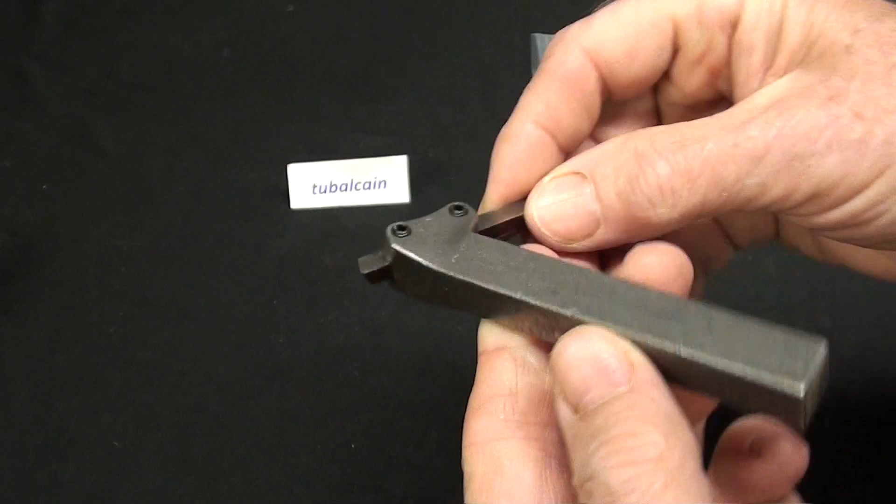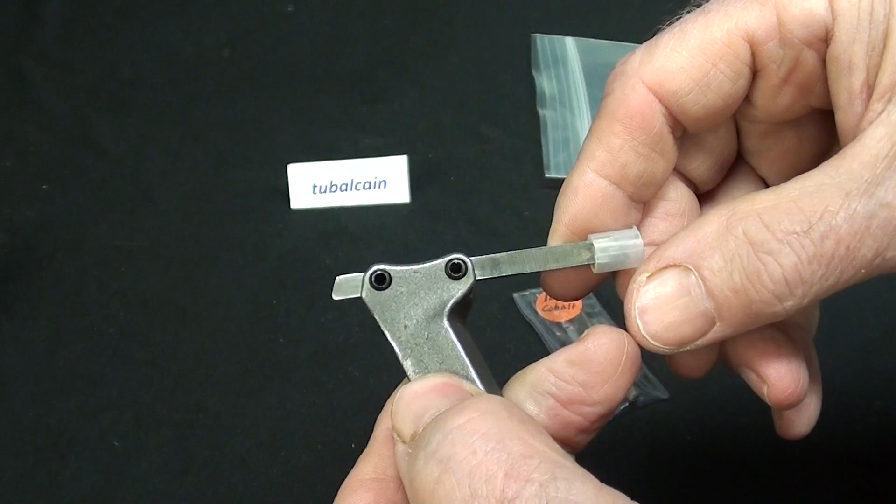First of all, I received an email and then a nice present from David Wimberley, and what he had given me was the Wimberley tool holder, and these are the instructions for that, and this is what it looks like. It is to be held in a Aloris type of tool post. Very interesting, and there are videos on that, and you'll see me using this in a future video. It uses a common high-speed steel tool bit. I think you're going to find that interesting, and so am I, in that I have never used one of these. Thank you very much, David.

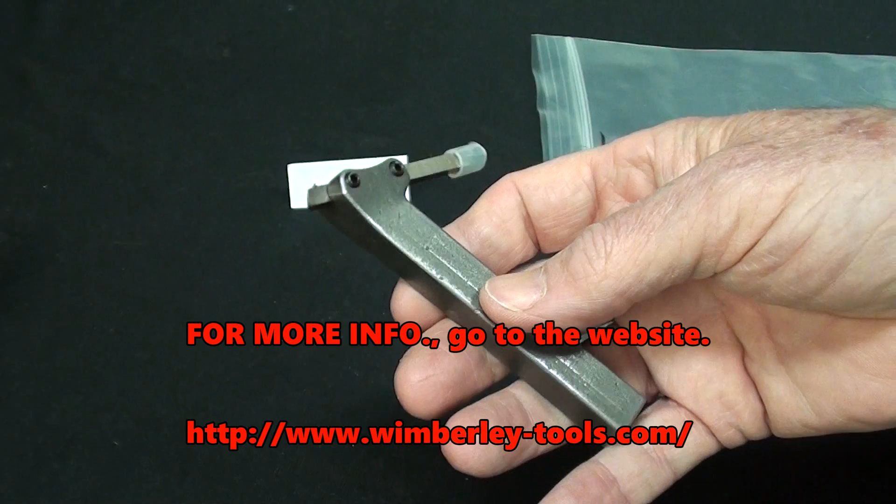Just yesterday, out of the clear blue sky, I received a mailing from Donald Warner from Illinois, and thank you very much for this, Don. In it are several catalogs, machine-type catalogs, but I particularly like this one on Atlas shop equipment, and it's from 1940. Now, I already have the one from 1950, and I have enjoyed looking through it and perusing through it, but this one is of particular interest.

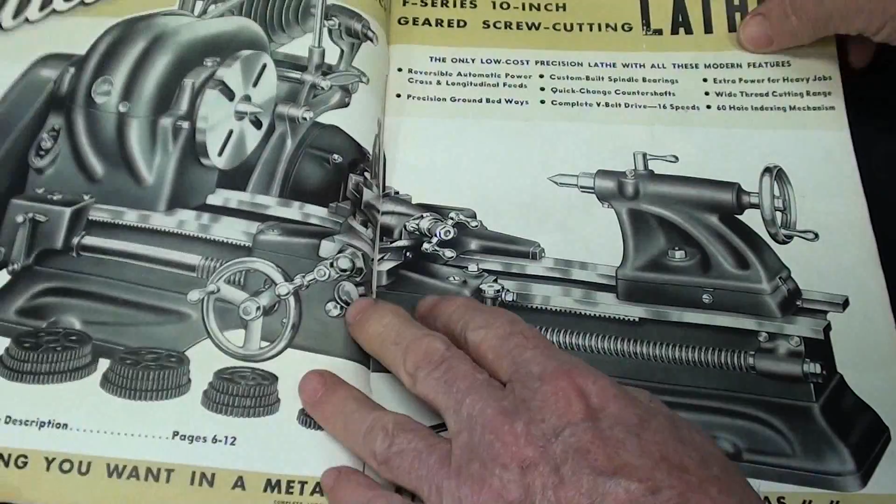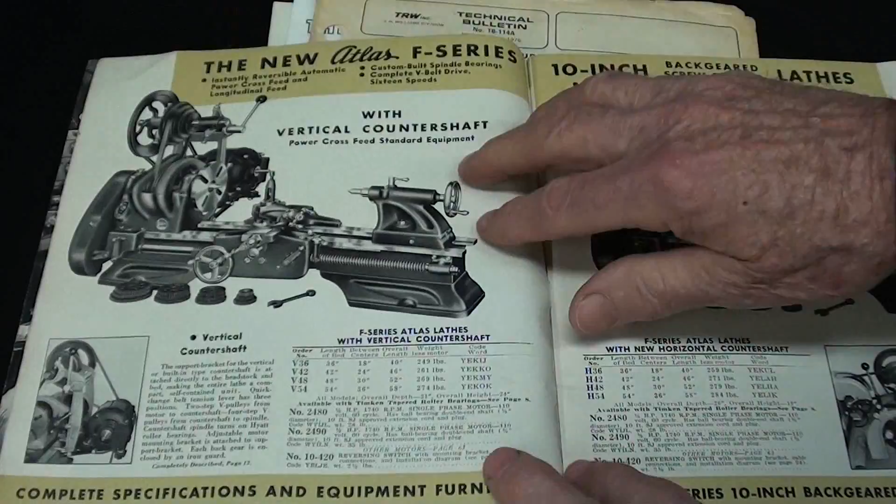It goes into great detail on the construction of all their lathes, the development of them, the features. Apparently the F-series here, 10-inch, was brand new in 1940, or those were the improvements that they made, and I noticed it's available both with plain bearings and tapered roller bearings, as shown here.

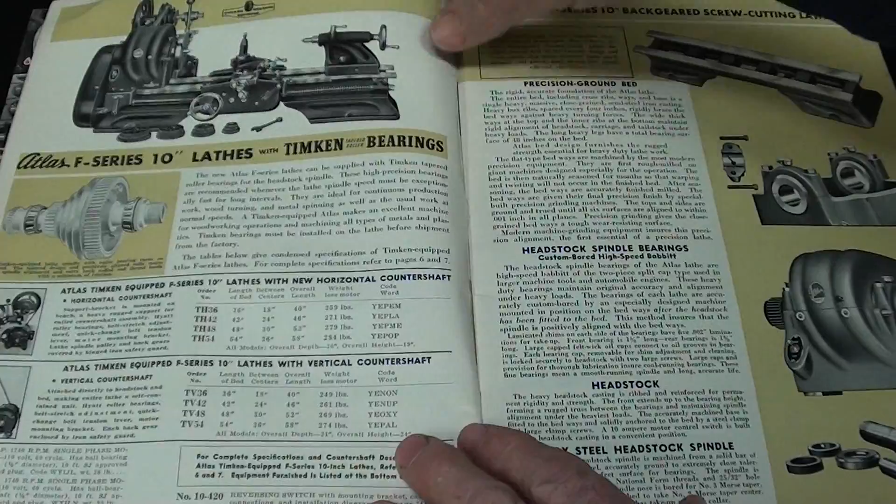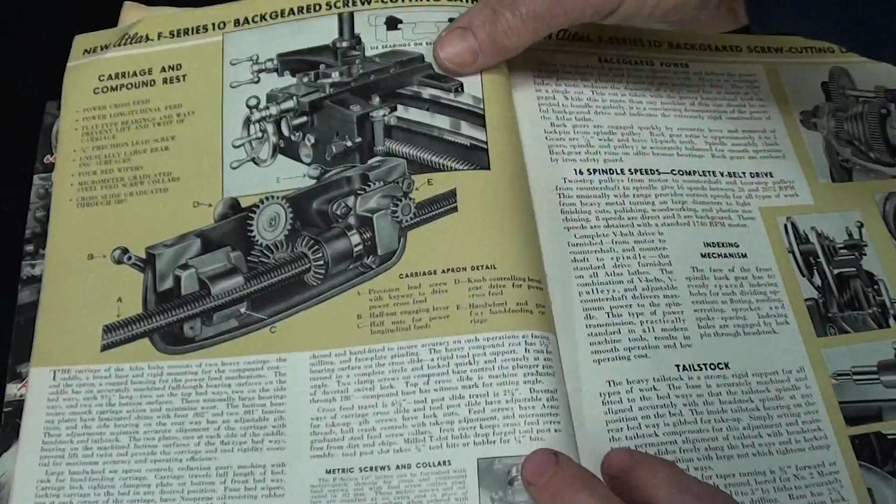Very detailed information on the construction. Look at those pictures of the apron, inside of the apron. You know, I didn't know that this was available, if I have that picture.

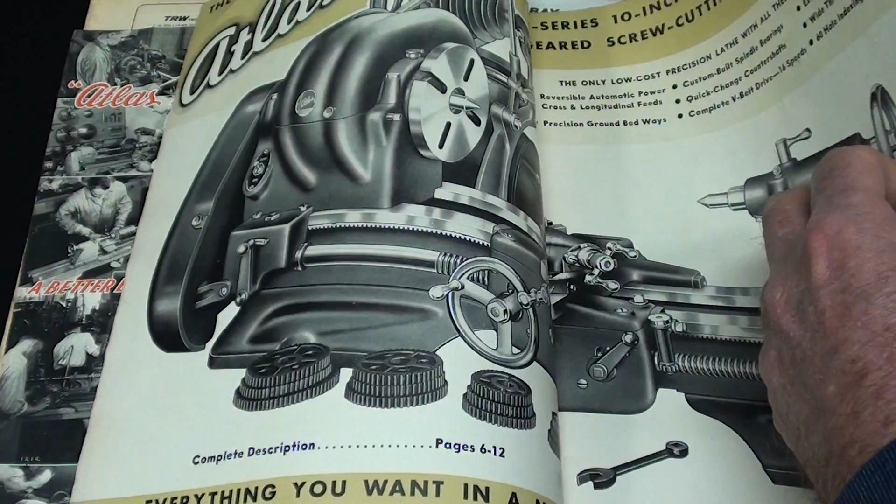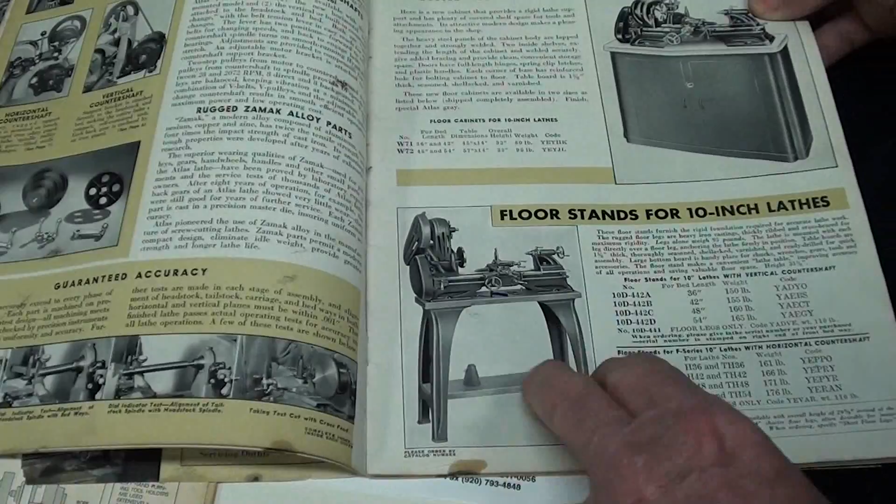Maybe I'll run across it, but on a cabinet. Well, there it is - the 10-inch on a cabinet that they provided. I've never actually seen one in real life, but there's the usual base that you see it, or it could be table mounted.

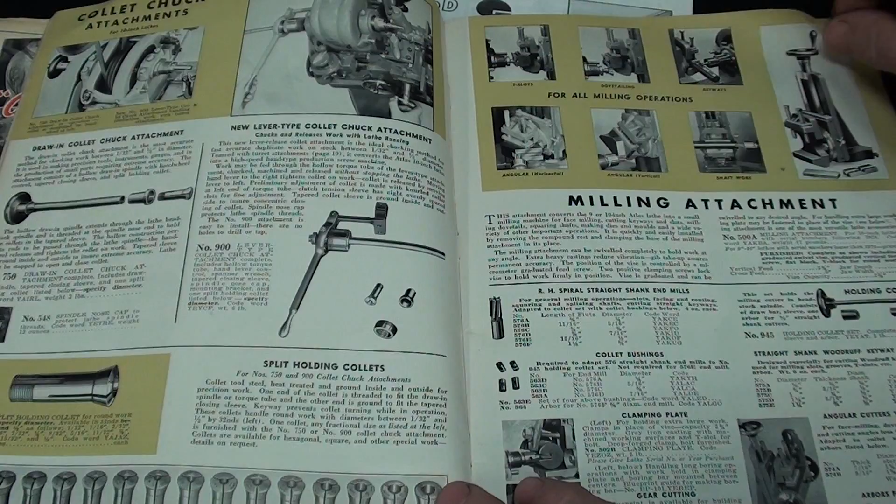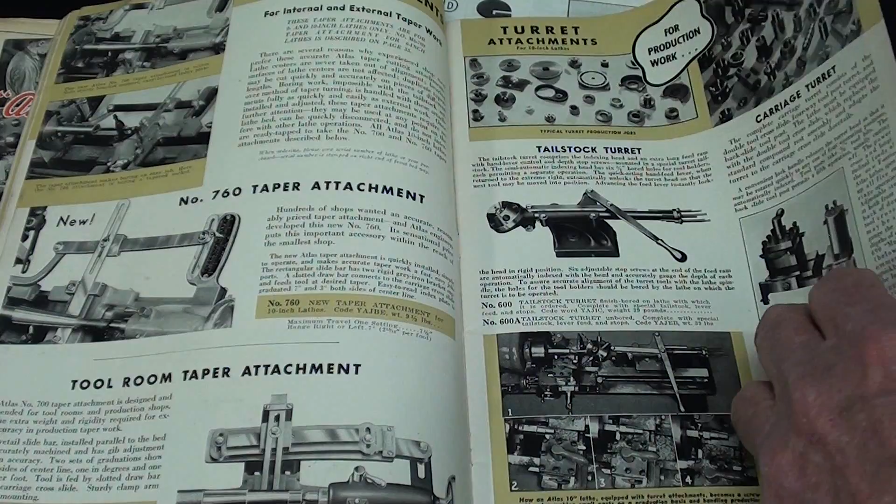And then all of the attachments, chucks, collets, and several things that aren't available anymore. They either didn't sell, or there was some reason why they took them off the market. Conversions to a turret lathe. And this was before the Second World War, and I was a negative 3 years old when this came out.

So I have already spent a couple hours looking through this. I really liked it.

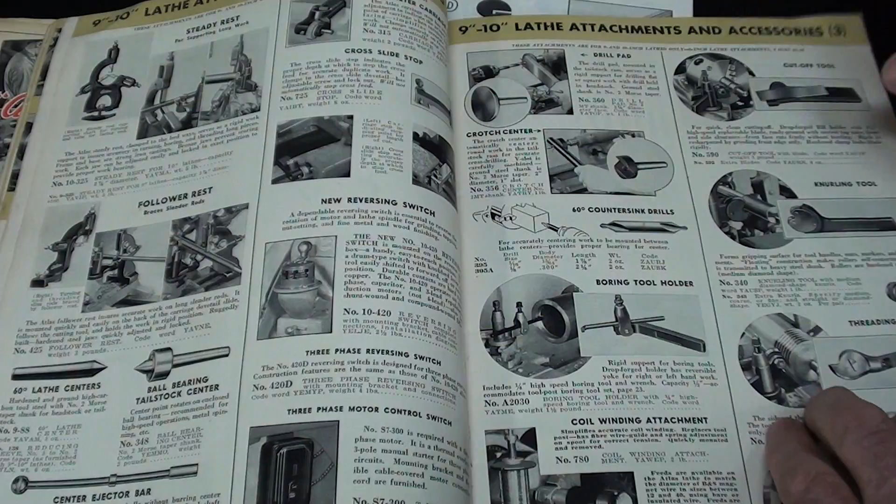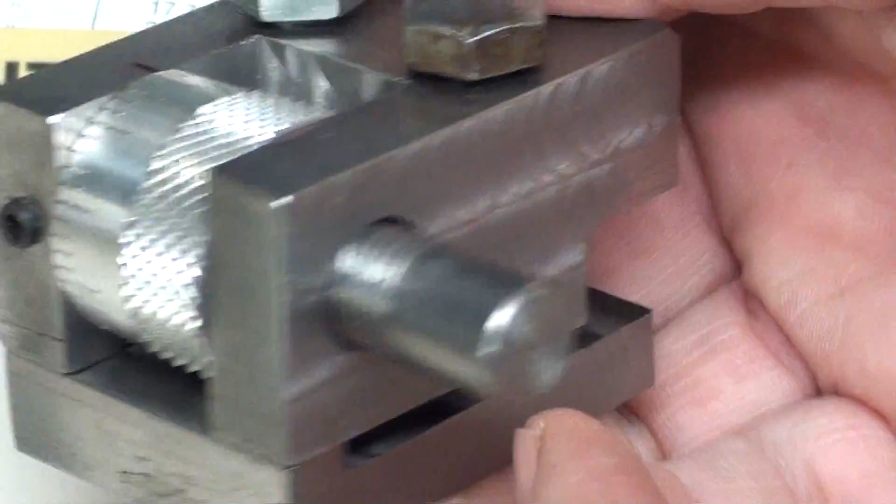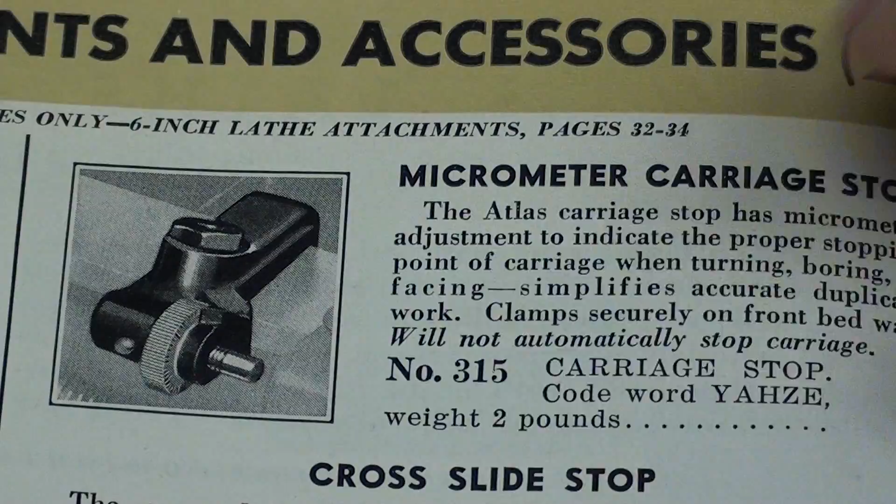This is the standard Atlas carriage stop, and you've seen me use that often, and in a recent video I showed you how to make one of these. But there was something that caught my eye in this catalog, and that is their micrometer carriage stop that they had in 1940, and look at the way it clips onto the bed.

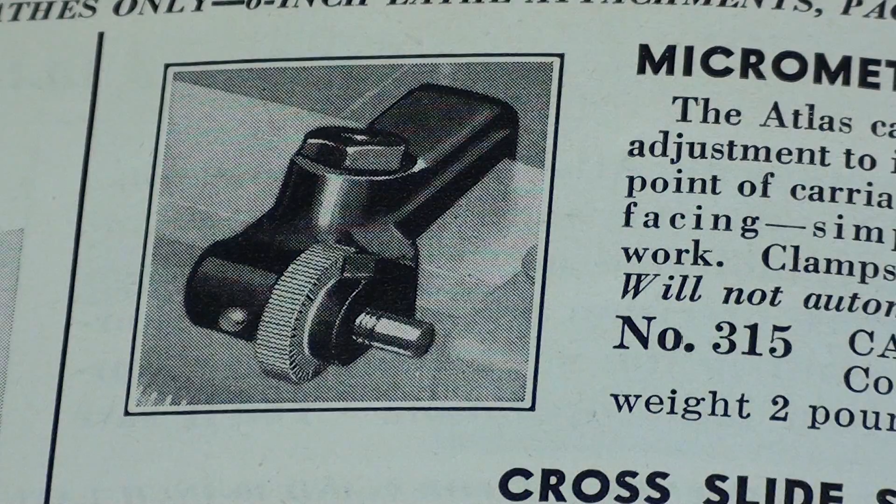Now, this must have been a failure. I've never actually seen one of these, and the reason it would have been a failure is that it would have prevented the carriage from advancing far enough toward the headstock, I believe. It would block the movement of it. But pretty neat little deal, isn't it? And that is one that couldn't cock. That's why I'm showing you that. It wouldn't be able to cock.

And in a follow-up of this, some of the comments were such that it ought to clamp across that. Well, they tried that and it didn't work. So that's why I'm pointing that out.

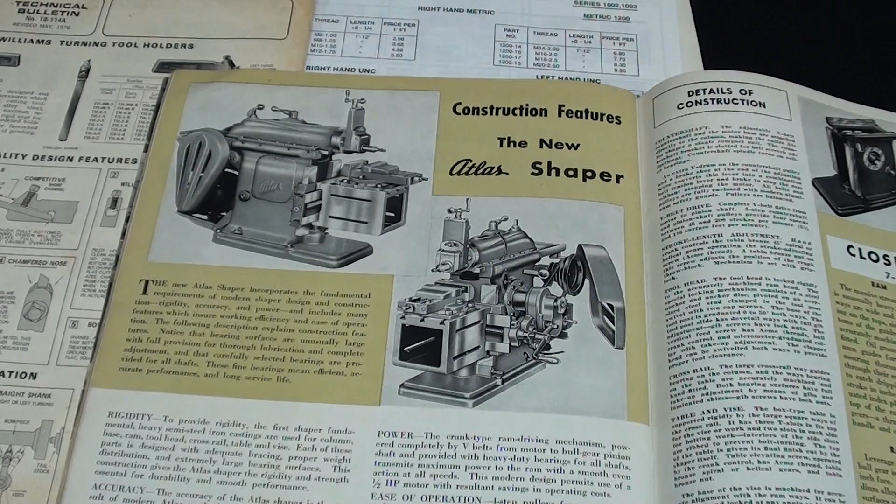Apparently their shaper was new, or darn near new, because it says new here in 1940. And in this catalog they did not have their little milling machine, so that must not have been introduced yet. But there are several pages here telling you all about its features, and then a grand picture there of it.

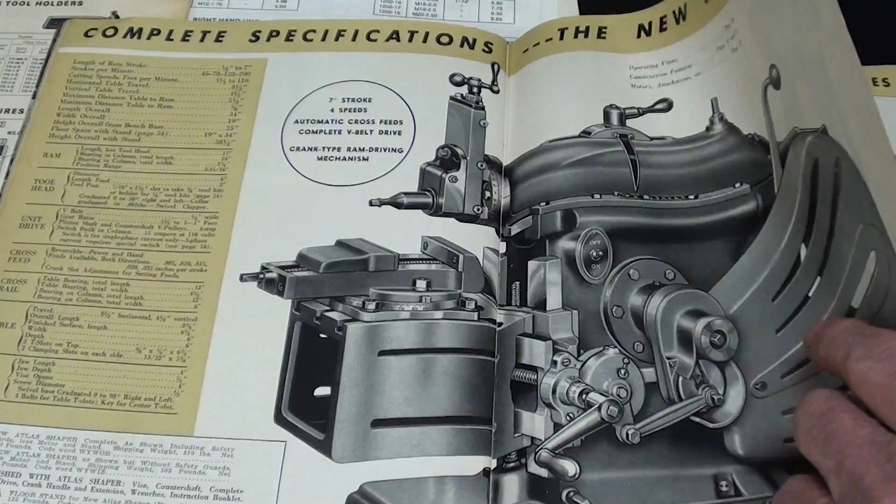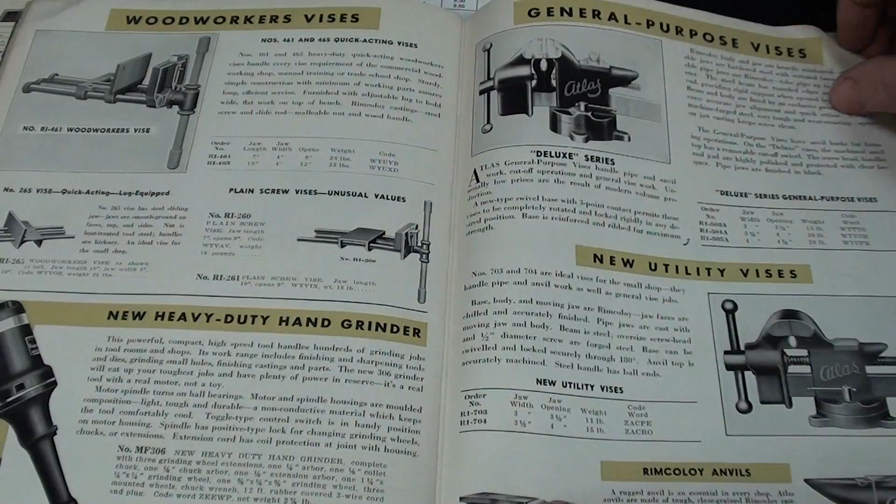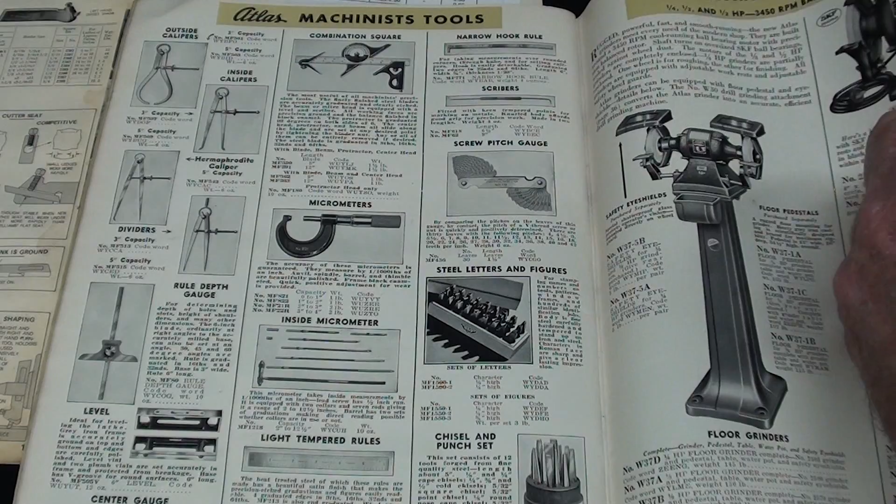Also, I had no idea that Atlas made bench vices of all kinds with the name Atlas right on them, and also anvils, woodworking vices. They offered a complete line of machinist tools, but I think they were rebranded. They appear to be Goodell Pratt.

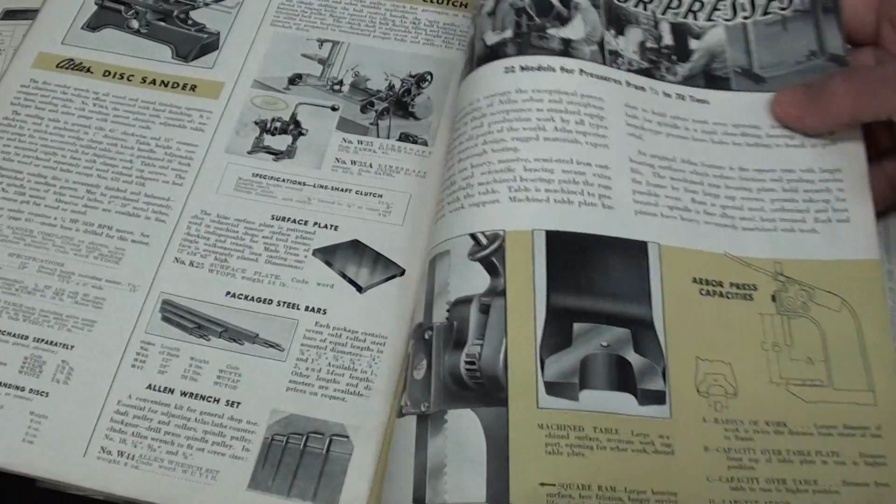They had a neat little belt disc sander and a complete line of arbor presses that I was unaware of, from very small to larger ones and even hydraulic ones. So I thought you would find that interesting, pictures of the factory as I did.

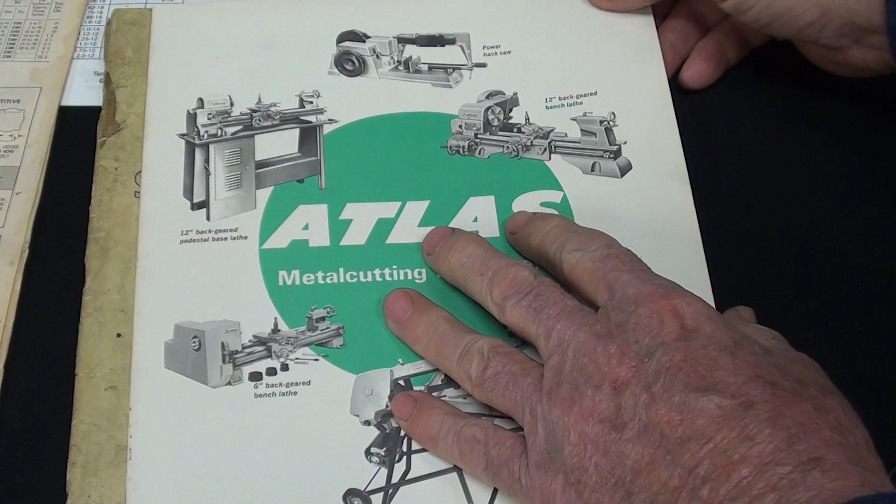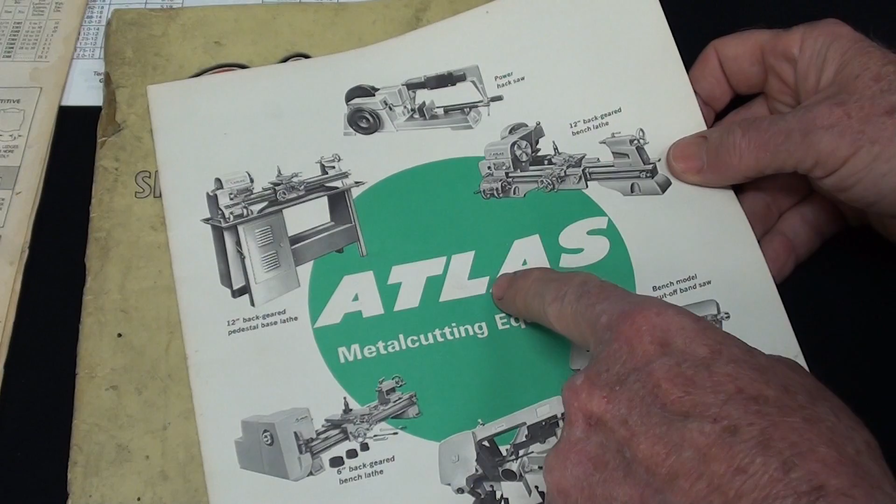Also included in that package was a more modern Atlas catalog, from 1976 or 78, so it's 40 years newer. But you wonder what they were thinking of when they changed this beautiful logo here in script to this. What were men smoking in the boardroom when they made that decision? Which do you like better?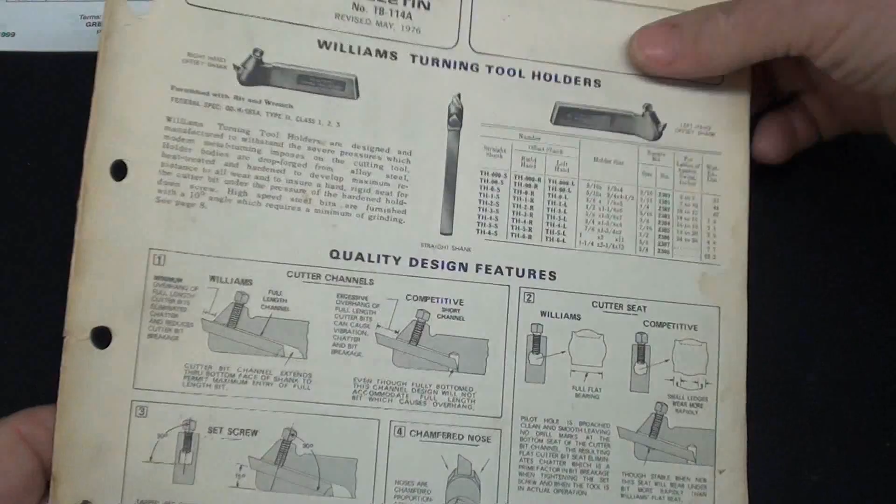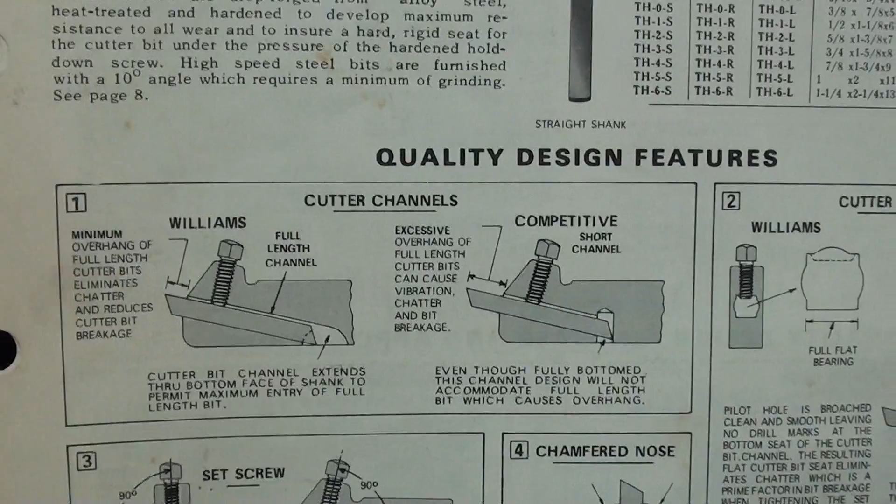He also included these catalog sheets from Williams, from 1976, so they already were a division of something else, which I'm sure caused them to fail and stop selling these. But in this sheet here, there's wonderful information about their tool holders, and in each view they are comparing their Williams with a competitive brand. What do you think the competitive brand is? Could it be Armstrong?

And showing you how to use them. Then on the inside, similar views, I hope I'm not boring you with this, of how to use the knurling tools.

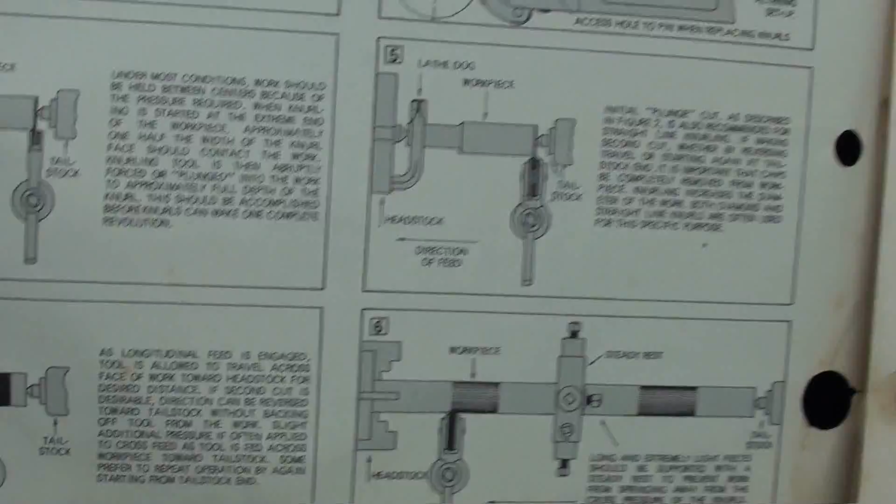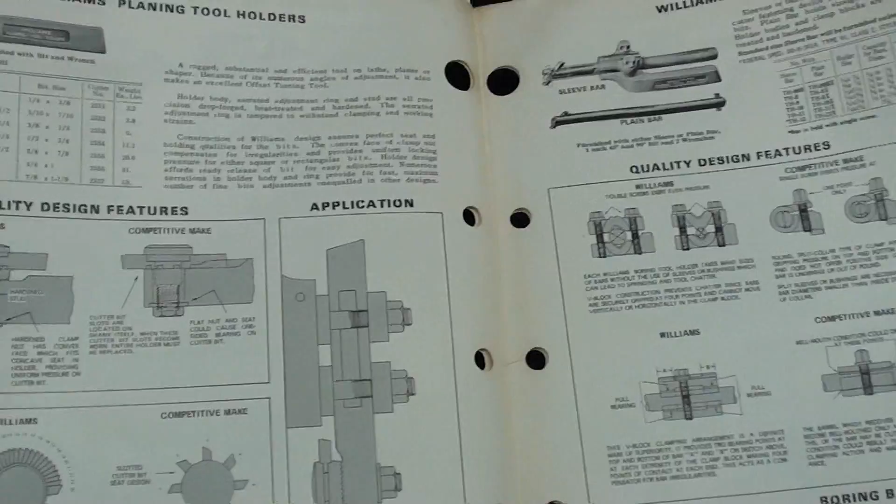They don't have catalogs like that anymore. Well, they don't have paper catalogs at all, everything's online. I just love these paper catalogs, these older ones, that's why I'm so glad this was sent to me. Here's all kinds of information on planer tools and shaper tools. Well, nobody even uses those machines anymore.

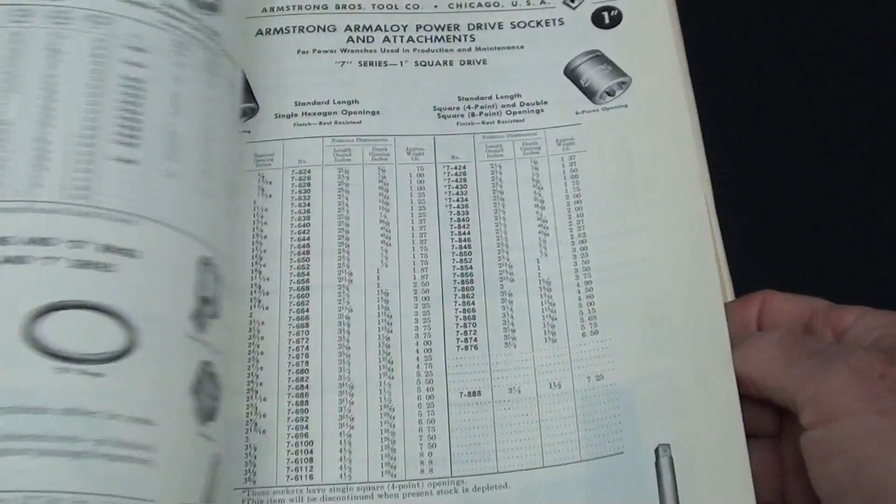So how awesome is that? I have had this in stock for several years already, many years. This is the 1966 one, the same as I had at the high school, from Armstrong, showing their complete line of wrenches and lathe tools and so on.

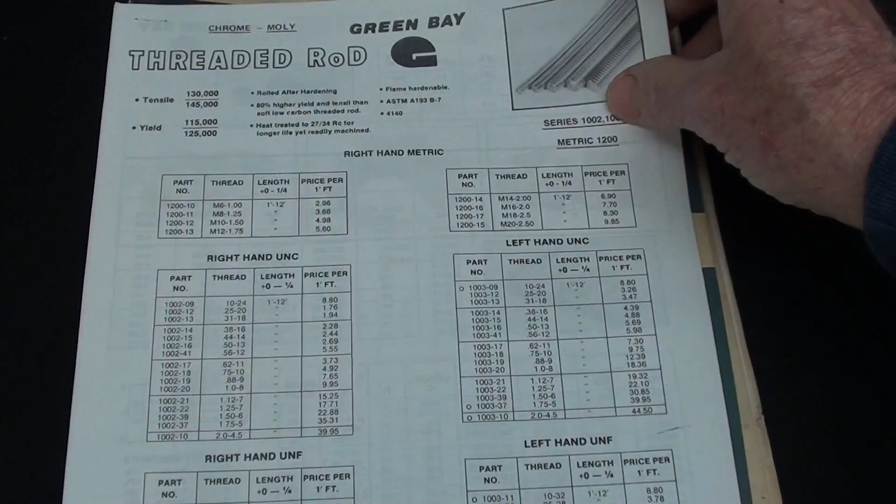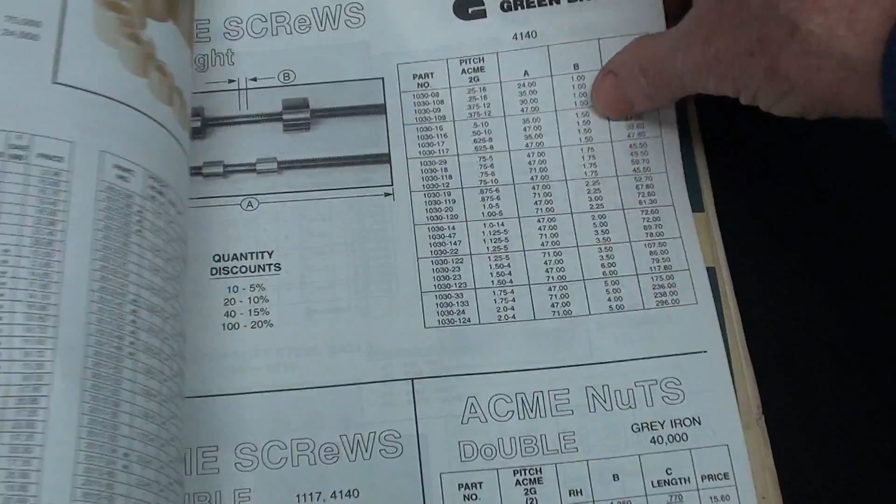So thanks again, Don. Also in here were some sheets on threaded rod. Well, why is that interesting? Because they have Acme threaded rod and nuts and so on. One thing I found of interest in here, look at Acme doubles, Acme nuts double.

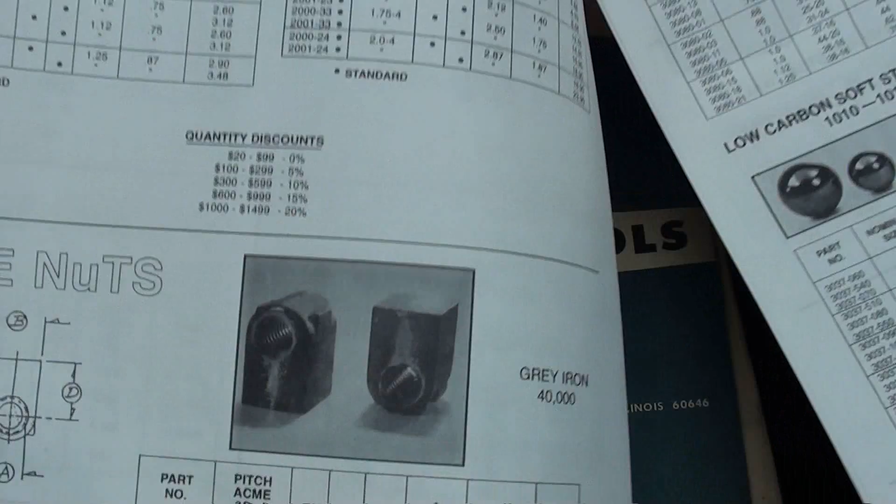You could buy Acme nuts that obviously could have been used and modified for a lathe compound or cross slide, and they're cast iron. Why do I say that? Because they're left hand and right hand. Is that neat? Those were $25 forty years ago.

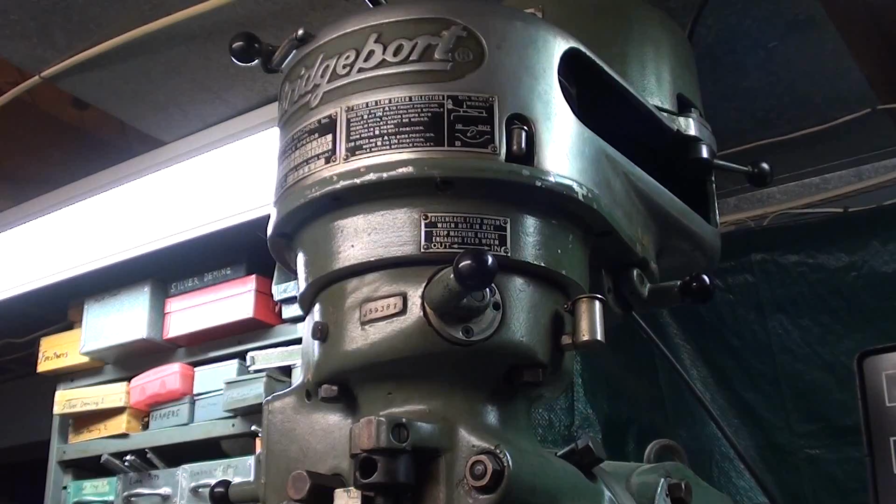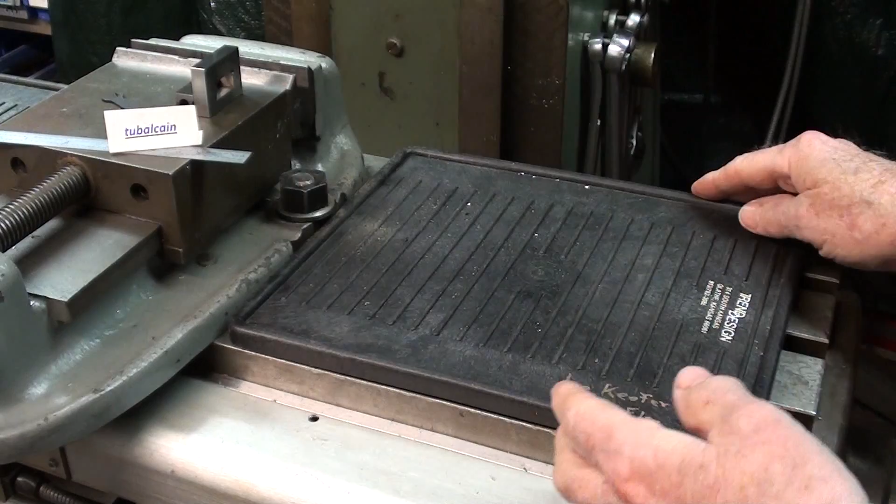I'm over at my Bridgeport mill right now, and I wanted to show you something that Joe Keefer out of Jacksonville, Florida recently sent me as a gift. Thank you very much, Joe, I'll be getting a lot of use out of these. They are a plastic table cover for the milling machine table, and they are a platform - look at how they're made on the back side.

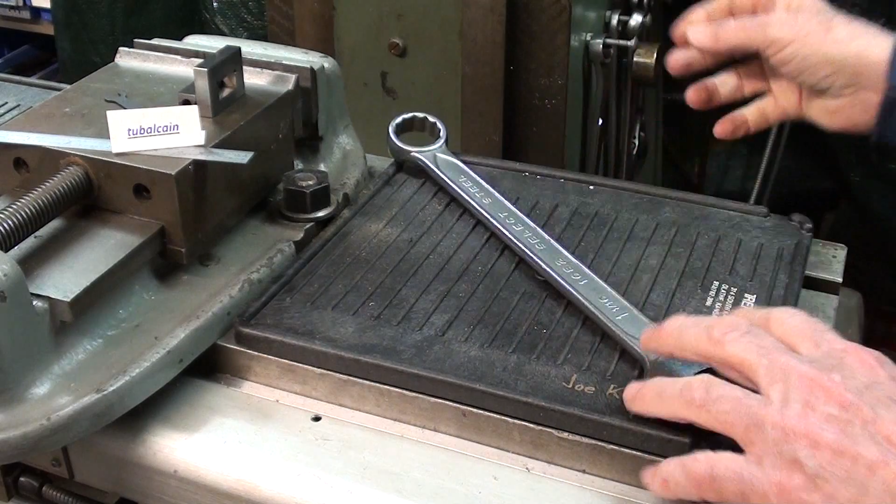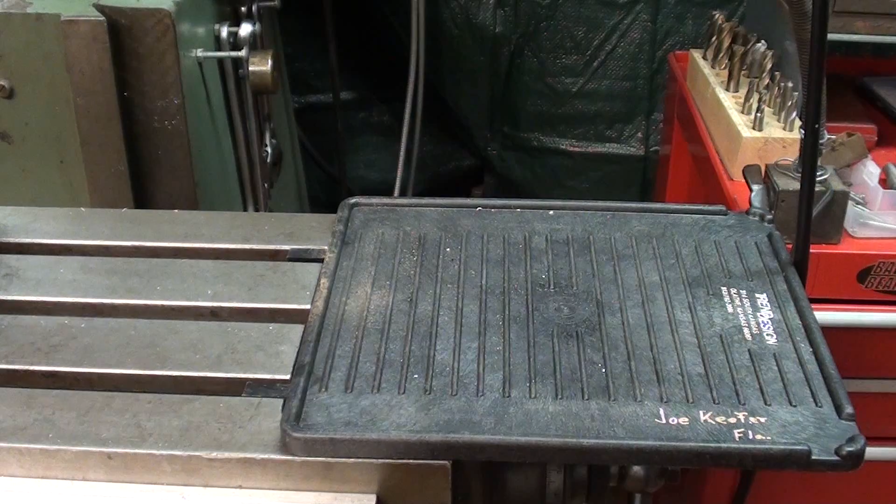They fit right into the T-slots. You can pull them out to dump the chips off, so it'll help you clean up. It makes a nice place to set your hammers or your work or your wrenches or whatever you got without damaging the table, and they won't roll off because it's got a tread on it. So those are real neat. You can also use them like this, a little bit outboard, to extend the length of the table, so you get even a little more workspace.

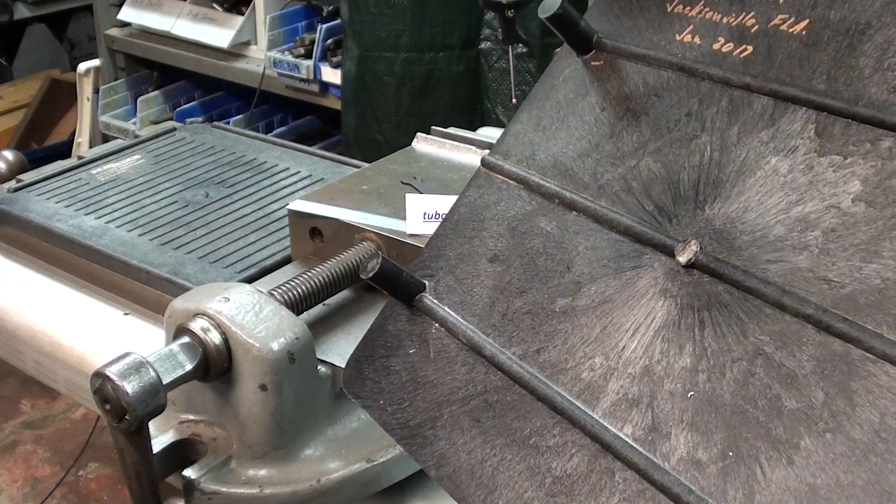How awesome is that? So I'll be using those all the time. Thank you, Joe. I guess I forgot to tell you, those are made by Trend Designs out of Kansas. Pretty ruggedly built, too.

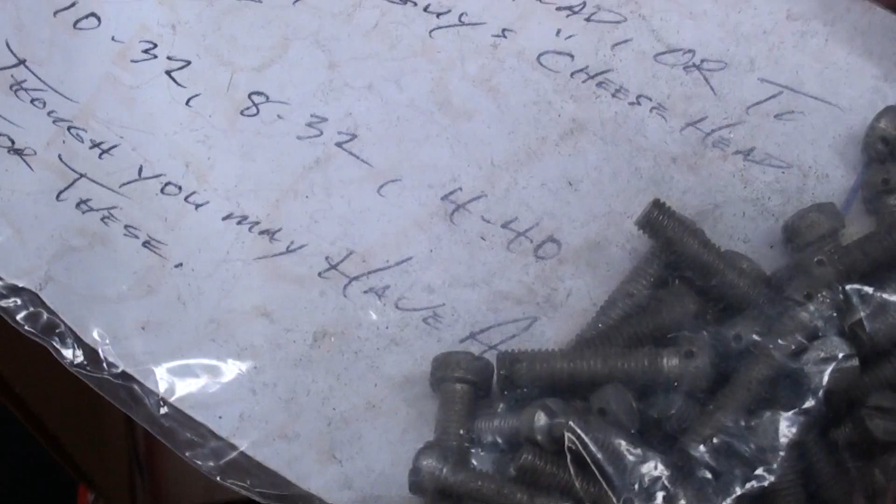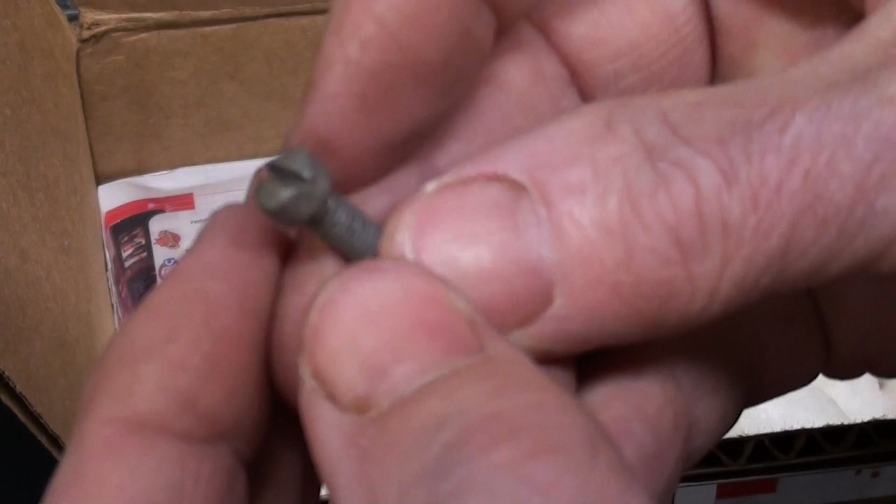In a separate mailing several weeks later, the ever-thoughtful Joe Keefer sent me another care package. And in this package, he included some cap screws. I think he heard me lamenting the fact that I missed number 12 and number 14 screws, which are either not available or they're rather obscure and a special order. But here he sent me some 12-28 by 1 inch socket head cap screws, a nice quantity of them, also the same thing in 3/4 length and 1/2 inch length, as well as a nice selection here of fillister head screws, aircraft grade, in several sizes, as noted right there.

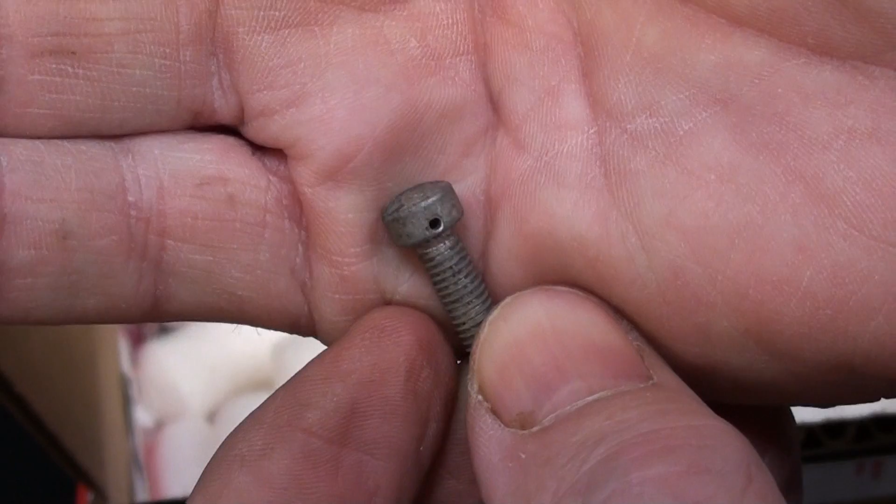But the interesting thing about these - a lot of people do not know what a fillister head is. It looks something like a socket head, but of course it is slotted. You used to see a lot of those on carburetors. And the screwdriver doesn't slip out of the slot, so those are awesome.

But what makes these aircraft grade, other than possibly the alloy, I don't know. But look at that hole in there, for safety wiring I suppose. And you know what? I bet drilling that hole doubled the cost of these screws, if you know how difficult it is to drill millions of holes like that, cross holes, and how many drill bits they probably went through.

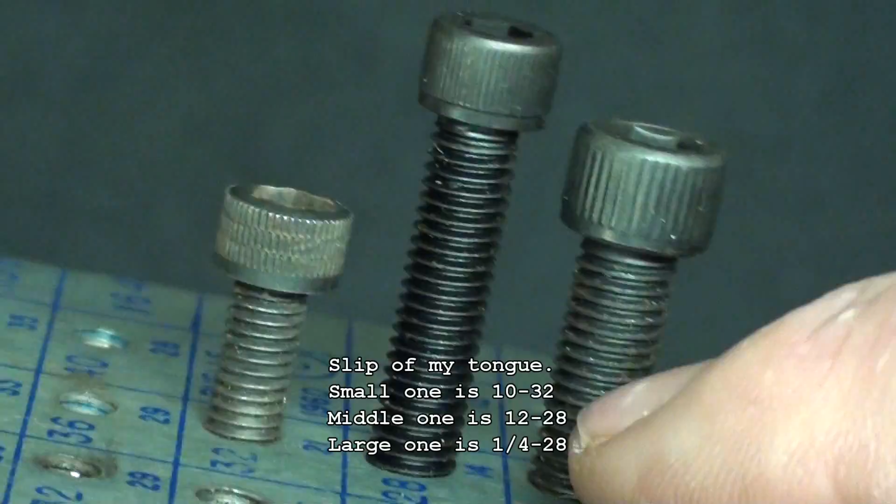Again, thanks, Joe, but let me show you something else about those screws. Using my Brownells screw checker here, I took the liberty of putting all three of those screws into the appropriate slot there. Now the middle one is the number 12 that Joe gave me. Here's a 10, of course the 12, and the quarter.

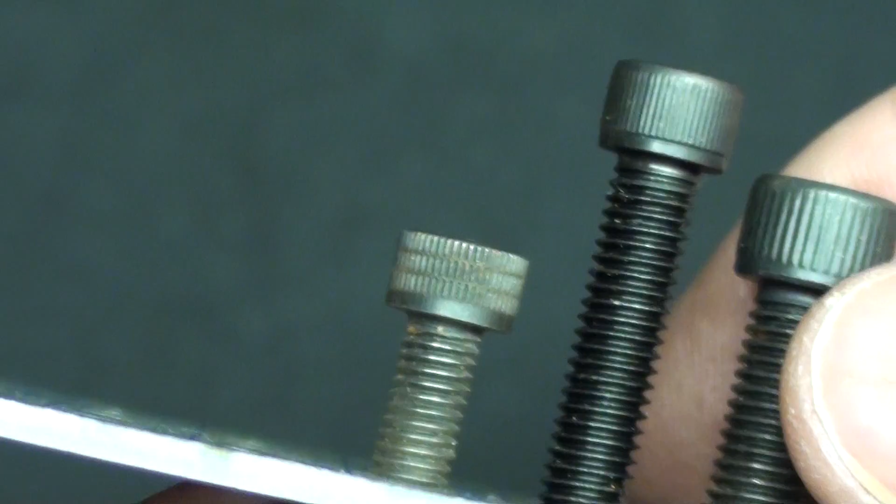Now there also is a 14, so you can see that there is somewhat of a gap here between this one and this one. But look at how close together a 10 and a 12 is - almost, if you just had them in the palm of your hand, you wouldn't be able to notice the difference without a trained eye. But the in-between sizes like that are just a wonderful thing. And I doubt you'll find those at the hardware store, but I suppose McMaster Carr has them.

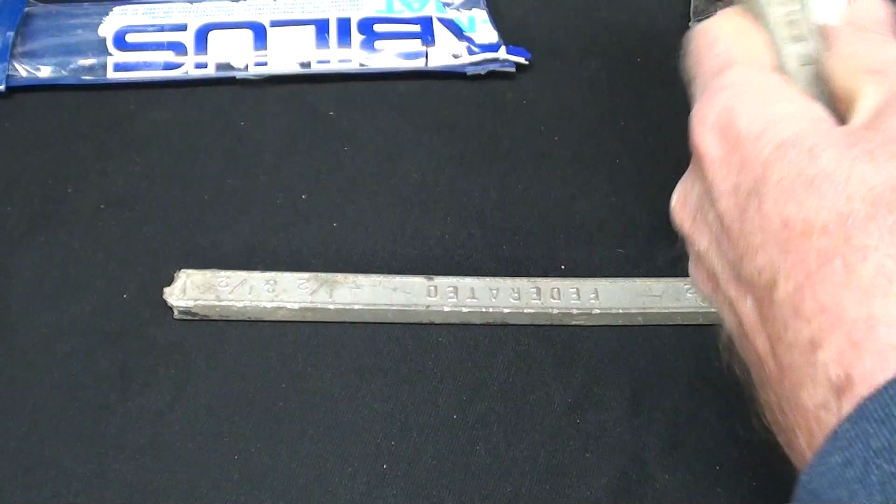Kurt Armbrust, out of Menlo Park, California, sent me a couple of bars of solder. I appreciate these guys sending me things like this. He paid $14.50 for postage, but here are a couple bars of solder.

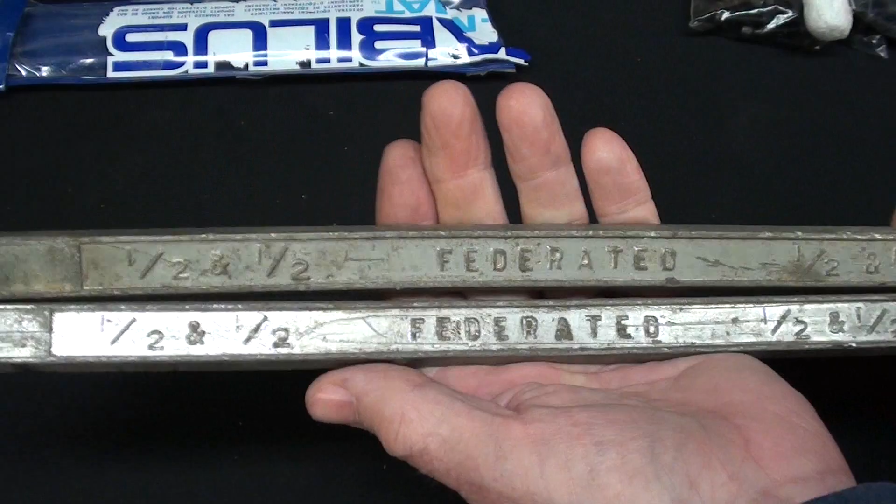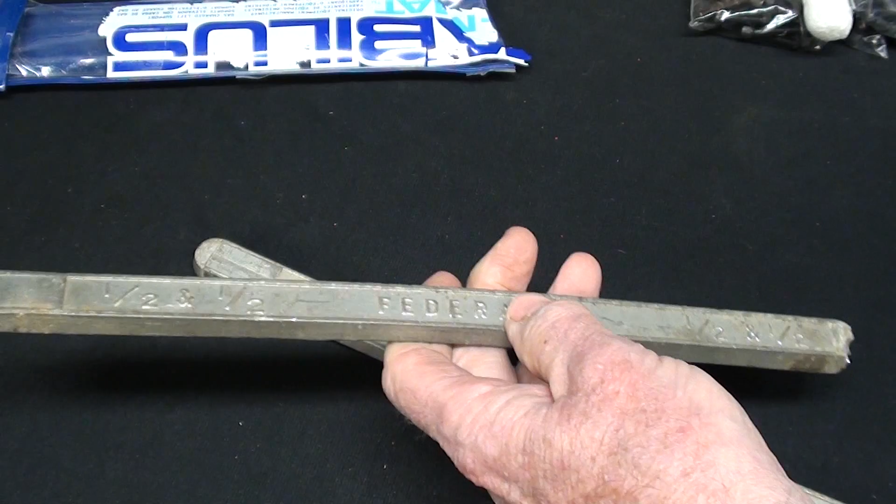Often I've heard solder called 50-50, and sometimes half and half, but I was surprised to see the words half and half actually on the bar of solder. Possibly someone paid 50 cents for those at a garage sale, not sure, but there's Federated brand, 50-50. That means, well, I think you all know what that means. There might be some out there that do not know what half and half means. But more and more, you can't even find lead-based solder.

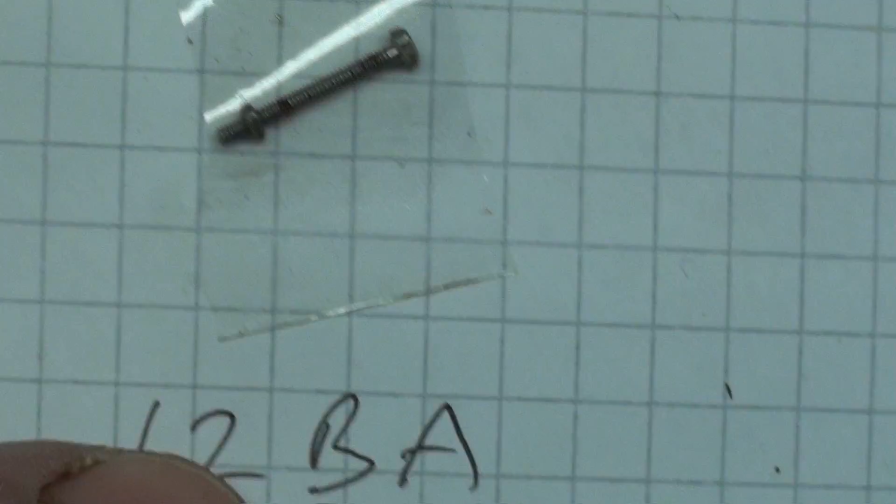Stephen Alec out of the UK knows I like these little crescent wrenches, adjustable wrenches I should say, so he sent me this one clear from over the pond, and it's 2.5 inches long, so that can be added to my collection. You saw an even smaller one in the last This and That, however it wasn't operational. This one actually does work. So thank you, Stephen. Also in that mailing, he sent me some samples of tiny screws used in model making.

We've all talked about the BA threads, British Association. Look at how small, that's the number 12. Usually we use about a 7 in the Stewart models. There's a 14. I had no idea that they were that small.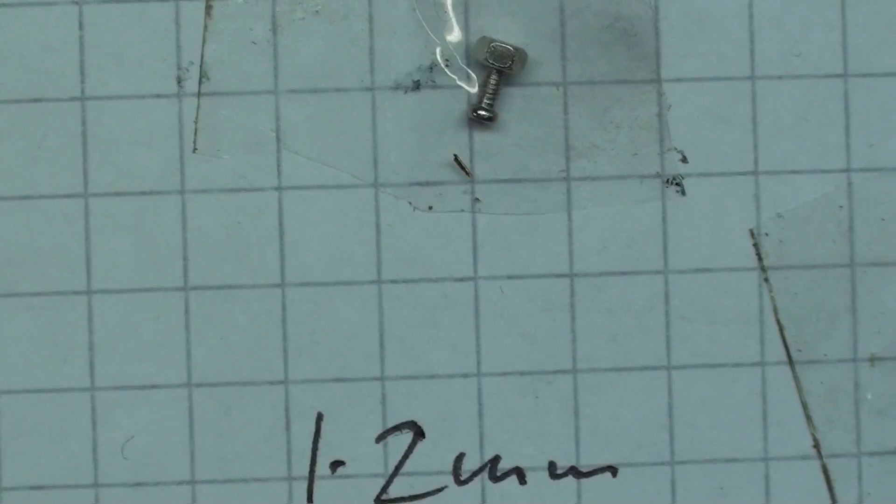And here's some, also for you guys that like your metric, there's a 1 millimeter, 1.2 millimeter, and a 1.4 millimeter. All right, thank you, Stephen. I guess I forgot to tell you the most important thing about that little wrench is that it's metric.

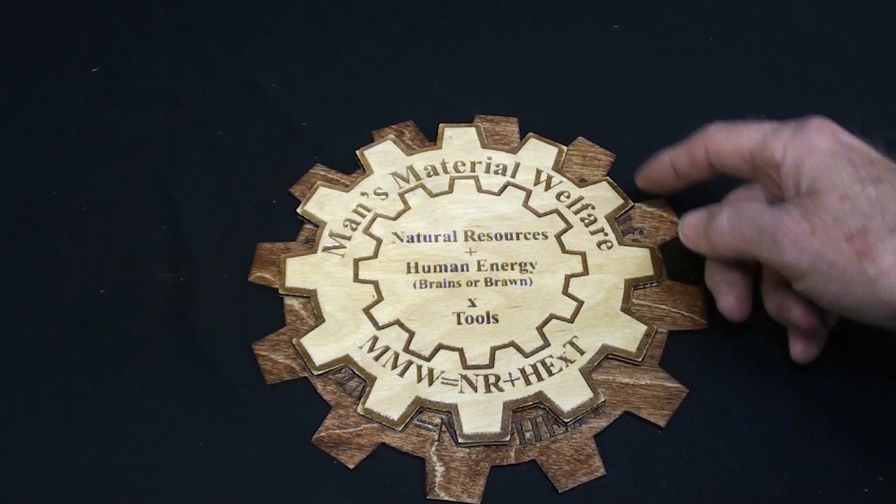Recently I was in contact several times with a man by the name of Dave Kalin out of Jackson, Michigan, and he's affiliated with the Makerspace up there. They sent me these plaques here which are part of the 10 Pillars of Wisdom. Why there are 12 cogs on the gear here, I do not know, but I thought that was interesting, something that they made up there.

It's a wonderful thing, and I've been contacted by people up in northern Illinois, and also there's one down in St. Louis, and I probably will visit the one in northern Illinois to see what they got going on. But this is the one up in Michigan, they have a brochure and a website and all of that.

I thought that is so interesting for people that maybe live in an apartment, or they're retired, or they can't afford their own shop, whatever the case may be, to get together in a space like that provided for them with equipment they could never afford or have access to. Thank you, Dave, for that information, and I hope some of you would pursue this and take a little look at these, because apparently these exist all around the country.